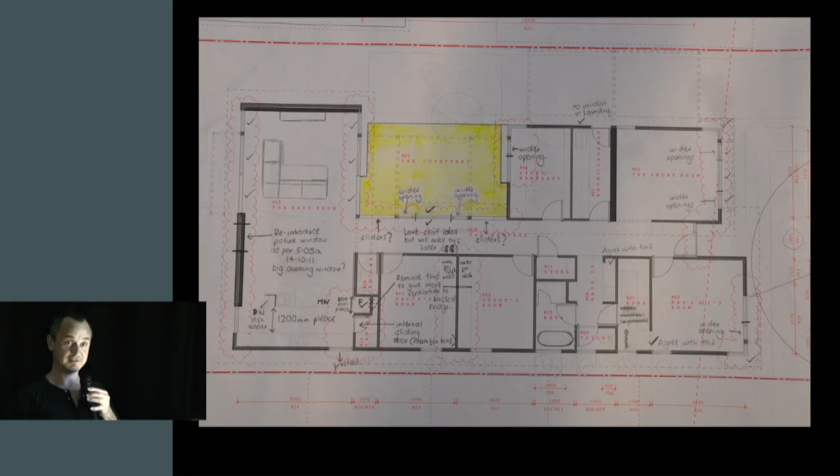Here is the planning. So it's quite fundamental, pen and paper, getting it right in the beginning. Kevin McCloud from Grand Designs said a design can save thousands of dollars in the long run. So if you get it right, this is just showing the progress of the planning stage.

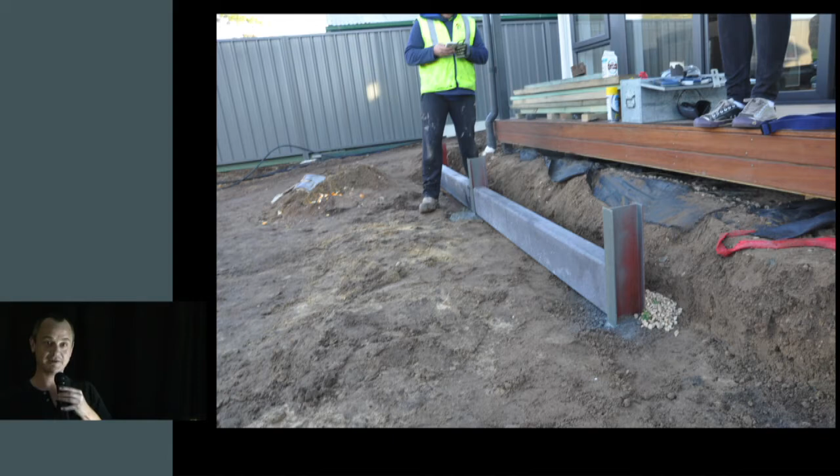Now this is talking about when you get the keys, you actually haven't finished the house. There's still a lot of things to be done. There's paving, there's all sorts of things. When you engage help from others, this is talking about paying back that help. So giving prawns to your son, giving beer to your father-in-law who's just helped.

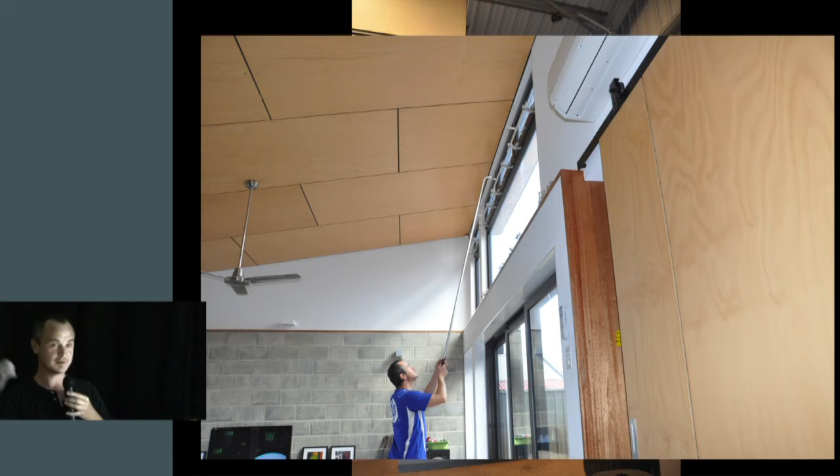This slide is about passive or sustainable houses need active occupants. So it's showing that you need to interact with the house, you need to act. On hot days you do something, on cold days you do something else. So this is me opening the upper level windows for cross ventilation.

This is capturing the energy. So the solar panels were one of the first things that got designed into this house. We face north, so we had to introduce two rows of panels, so that the first row of panels couldn't shade the second row of panels. So we did a fair bit of modelling, as you may have seen from previous presenters.

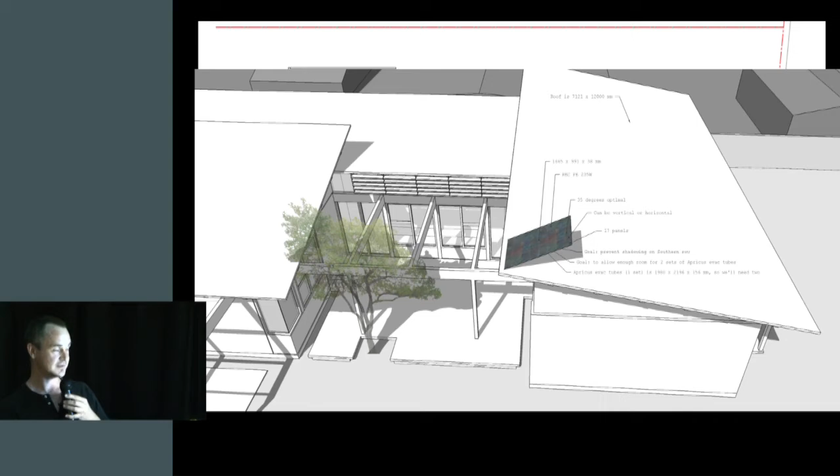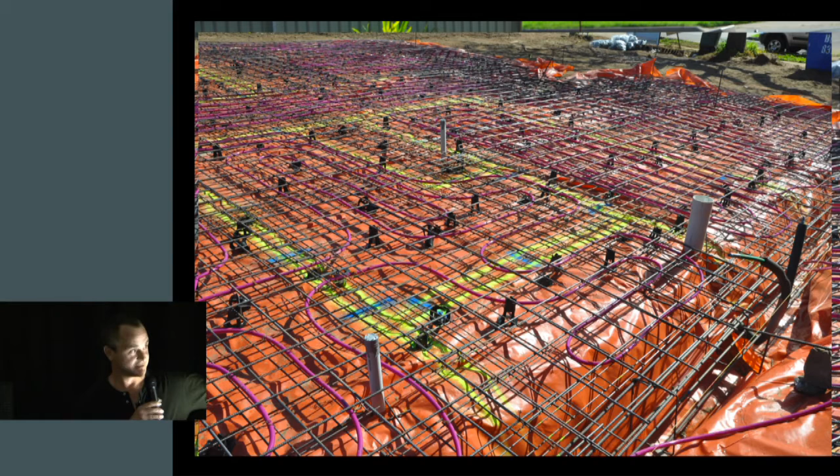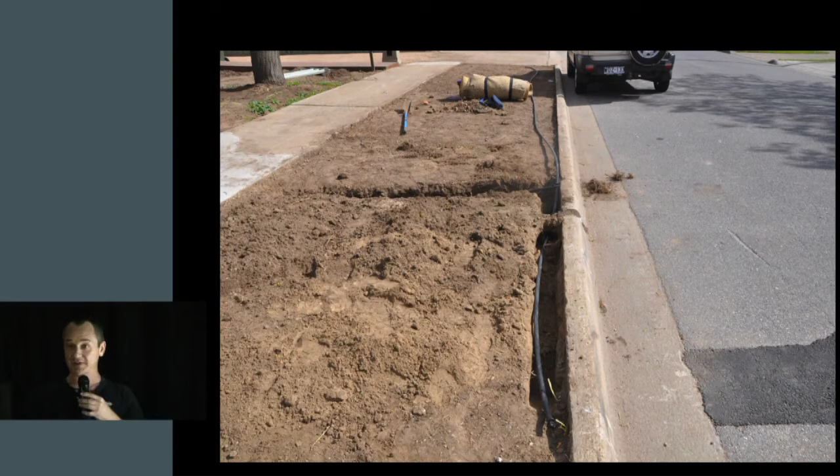This is my attempt at a guerrilla garden. So the council wouldn't let me put fruit trees on the front nature strip for our neighbours and friends to come and visit. So I've made that a bit more subtle. We've now built a tree house. So it's a fully suspended tree house, and if you come on Sunday, you'll see it.

This is statistics. So I haven't done the fancy modelling some other people have done. Every Monday night, I go out and collect the meter readings. I go into the Bureau of Meteorology, collect the data, and there's 130 weeks of data I've now got in this massive spreadsheet. So it's proof in the pudding.

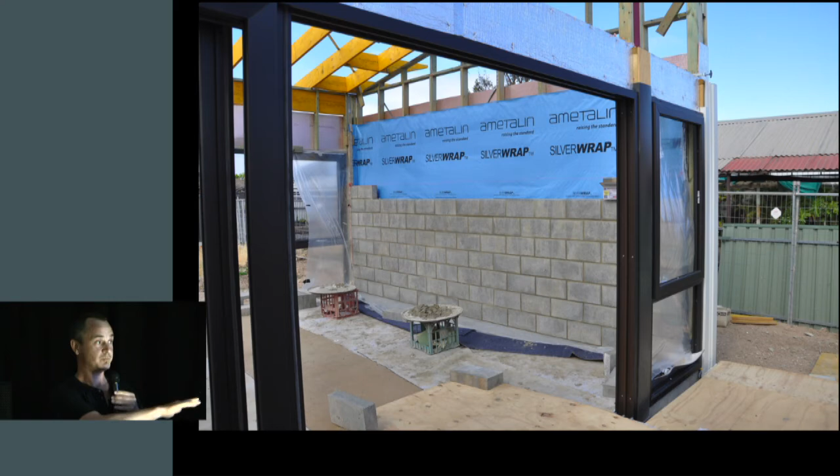Just talking about thermal mass, the argument's been won. We use the reverse block veneer. So this is the old Besser block. You may have seen it in 1950s houses. That's on the inside of our house. I don't need to explain why, I hope. And our spine, I wanted it to be a reverse block veneer.

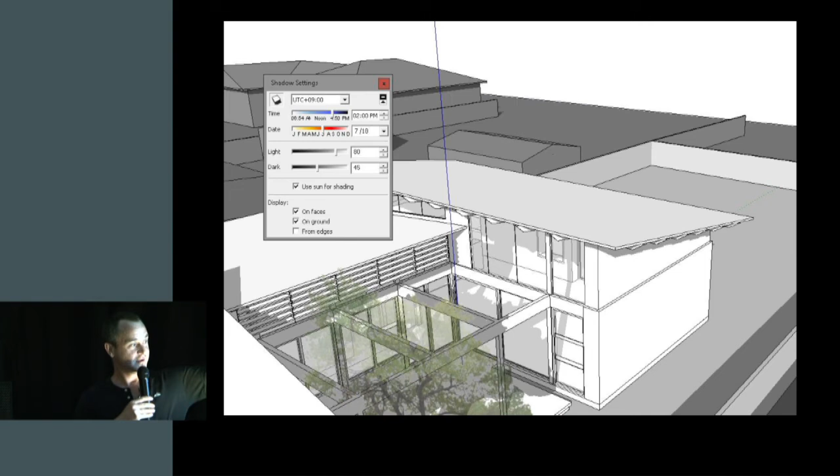This is some bit of modelling, so that's winter solstice, showing the sun getting way back. This is summer. But the western wall, we had a lot of sun coming in, so we've introduced this retractable shade sail. So you can see it there, it actually packs away in winter, we bring it out in summer.

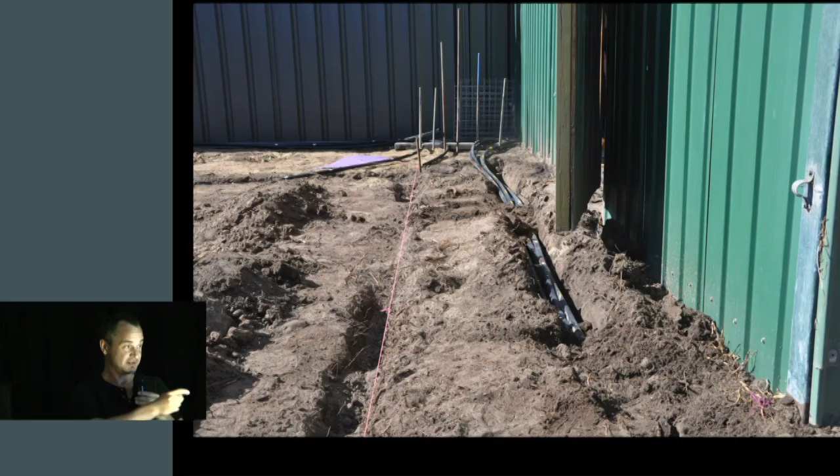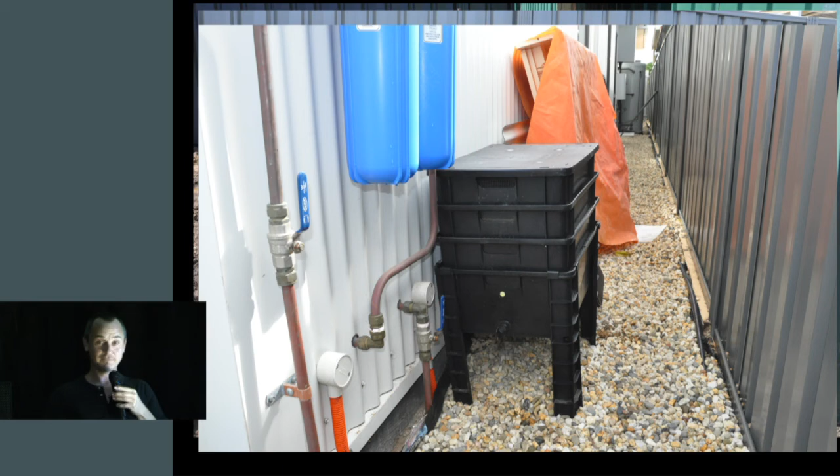Living close to the beach, we're really sandy soil. You can see it's quite sandy there. So we have a 2-stage compost. That's my handyman work. You can see it's not quite right. Worm farm. So both the compost heap and the worm farm we reused, put it back into the soil, and the soil's now pretty schmick.

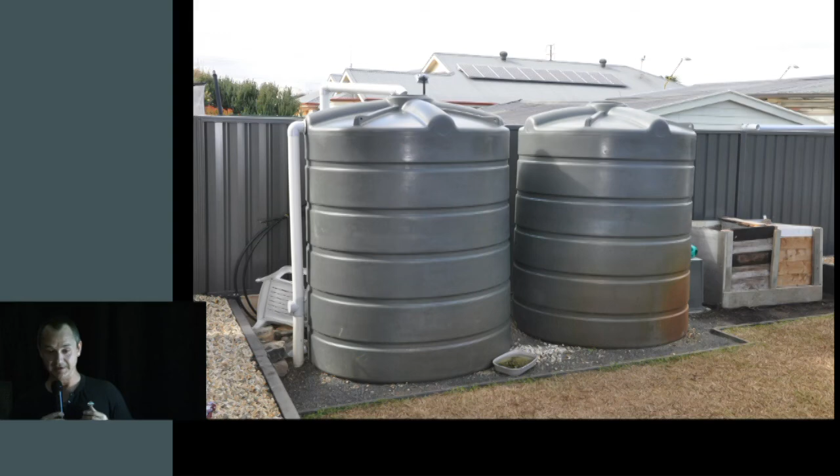This is retaining things that come to our site. So we retain rainwater. The thermal mass retains heat or cool. And we've used an air cell wrap. You may have seen that on Grand Designs. It's that foil sheet. And that's our double glazed windows with my son behind.

We had a fair bit of timber decking. The builder suggested Kapur. We researched it and went, no thank you. We went for grey ironbark, which is a properly forested, properly sourced timber from northern New South Wales, bottom of Queensland.

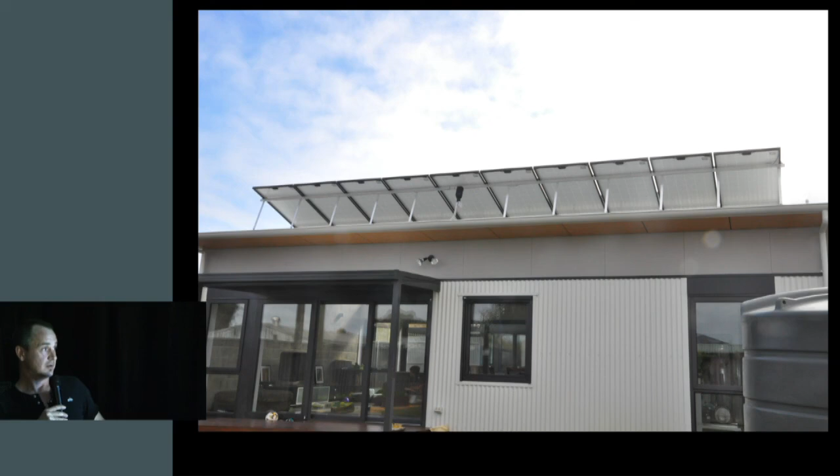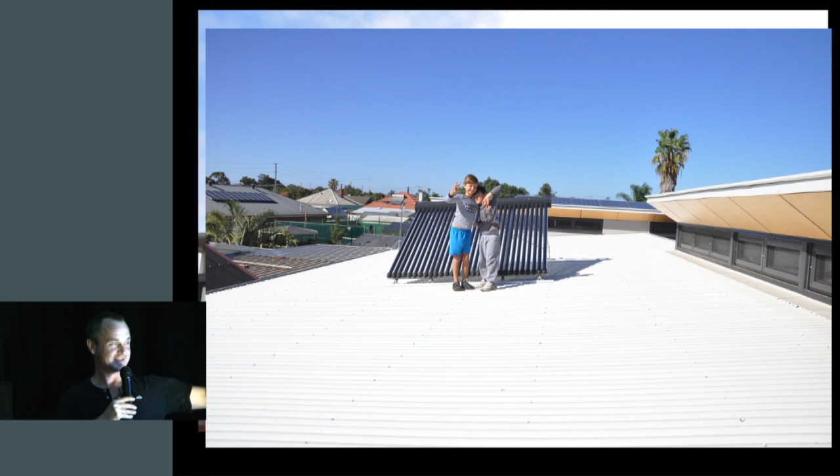This is showing solar panels. So from the south of the building, you can see that's the back row there. And there are 2 boys on the roof, my wife's shaking her head, letting my boys up on the roof. There's our evacuated tubes for solar hot water.